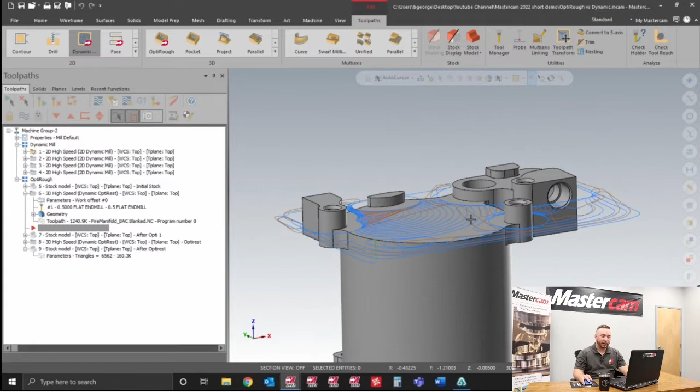Okay, so when we talk about dynamic milling and OptiRough, what we mean is how our dynamic milling is strictly a 2D toolpath, whereas OptiRough is a 3D toolpath. And now OptiRough can be utilized within the Mill 2D license. So let's take a look at something like this part. It's not something crazy complex by any means, but what we want to do is just rough this out.

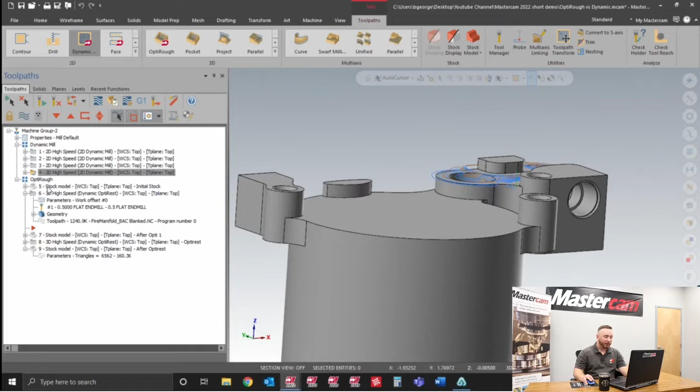And what I can see here is it takes me 4 dynamic mill toolpaths to rough out all of these different depths that I have on this 2D part. So I would have to go through and create all of these different operations to get exactly what I want. Whereas if I look at my OptiRough toolpath, all I have to do is basically create a stock model that says, okay, what is my material size that we're cutting? And using an OptiRough, I can achieve what all 4 of these toolpaths did just in this one operation.

So you can see the benefit of having this toolpath now available in Mill 2D because it's really a 3D toolpath, but we can utilize it now for different depths on our part. Very, very powerful roughing toolpath. All right, so now let's transition back to dynamic mill 2D. So when we can't use OptiRough or when we want to be really specific on what we want to cut first, 2D dynamic mill is not going to be obsolete.

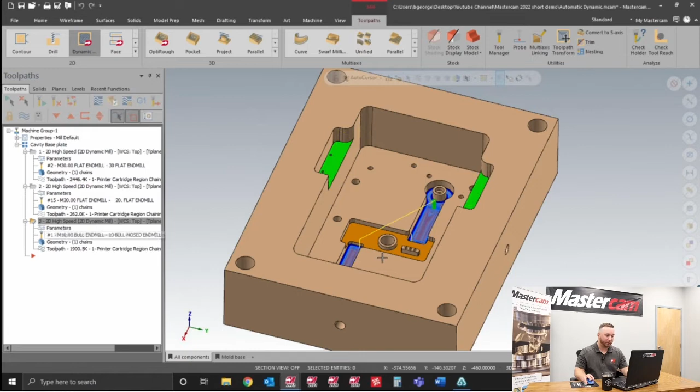So let's jump into Mastercam. What I want to go over is how this automatic region chaining works. This is what's new in dynamic mill. So these first 3 operations here, my first operation, I rough out that inside pocket. Second operation, I rough these ears out. Third operation, I am now roughing these blue closed pockets. What I want to go over is how we can intelligently rough this orange pocket with really one click.

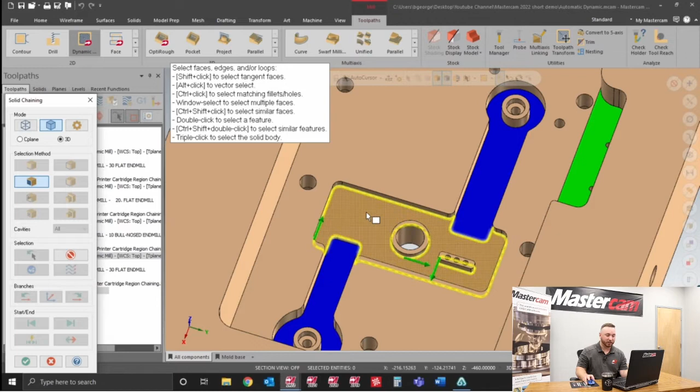So if anybody's used dynamic milling before, they understand that you need to define your machining region, your avoidance region, your air regions to really dial in that toolpath exactly how you want it. With this automatic region, I can go here and just select which face do I want to cut. I want to cut this orange face. You can see it scans the whole thing.

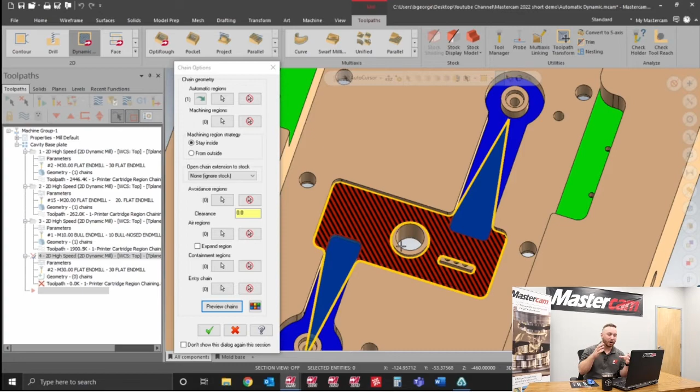Green check. When I preview that, I know just by using that one click that I have this perfect cutting toolpath. My red hatching is where I want to cut. My blue area is where my tool can enter in and out. And my bosses are now selected as avoidance regions. Super, super useful for the 2D dynamic milling.

All right, so now I want to take some time to talk about the third enhancement that we're going to go over today in 2022. So this enhancement is going to be found in the Waterline toolpath, which is a 3D high-speed toolpath that specializes in a constant Z step down. So let's take our cool Knowledge on Tap Yeti, for example. This Yeti is about 5 inches.

If I tell Mastercam I want to take 2-inch step downs all the way down this cup, it'll only take 2 step downs because it's not going to see the bottom here and it's not going to go another 2 inches down to finish the floor. But what we can do is now in the Waterline toolpath, we can utilize what we call constant flats to be able to now see those flats and really machine those.

So let's jump right in. You're gonna see the same example that I was just telling you guys about. This is a 2mm step down, and you can see we're not cutting on the floor here, we're not cutting on the floor here or here. But just by adding in the parameters here, turning on my critical depths to say include flats, now we add this cut at the bottom.

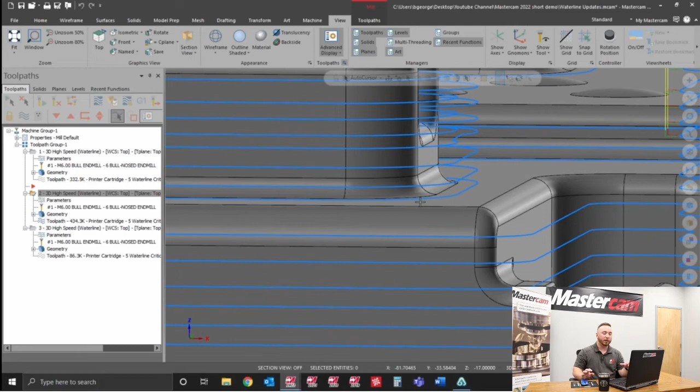So essentially what that means is no matter what step down we set, whether it's a huge step down or a small step down, it will guarantee to hit that floor, which is huge for the Waterline toolpath. And I could dive into this for another 15 to 20 minutes to really go over all these different examples and where this can be used.